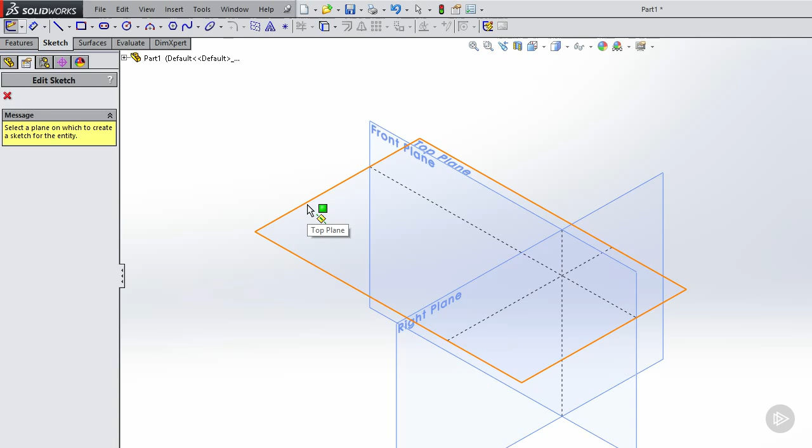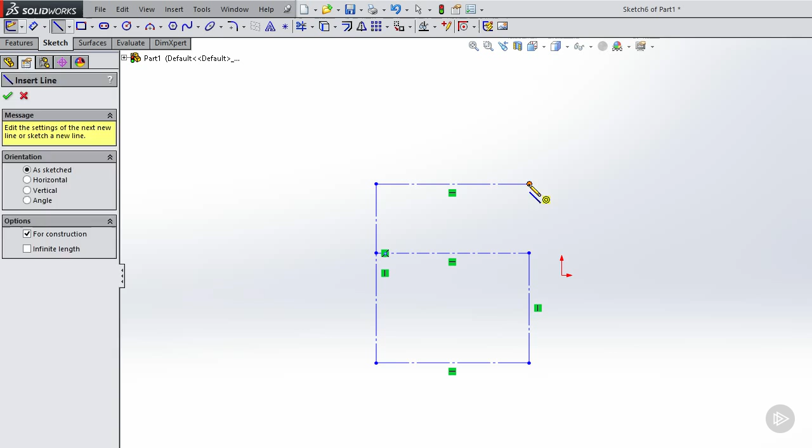The first thing we want to do is open up a rectangle sketch on the top plane, making sure it's for construction. I also want to draw a center line right about here, then trim this away because we're going to add two more lines like this, and make them equal. You'll see later on why I'm doing this.

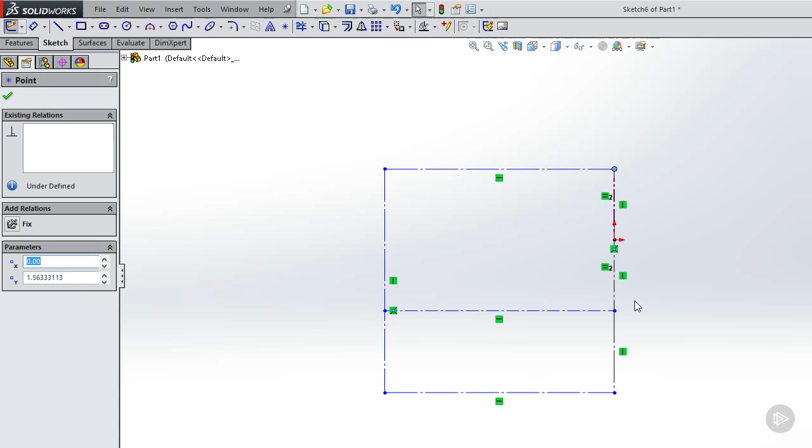Basically, this is going to be the top view of our controller body. Because the controller is symmetrical, this is actually the center of the controller, and this is the far left side. I've designed it this way so we can control the controller body in this area, and the handle will come down here, so we can control that dimension as well.

So let's measure this to 4 inches, and we're going to make this 3.1, and for this dimension we're going to make it 2.3 inches.

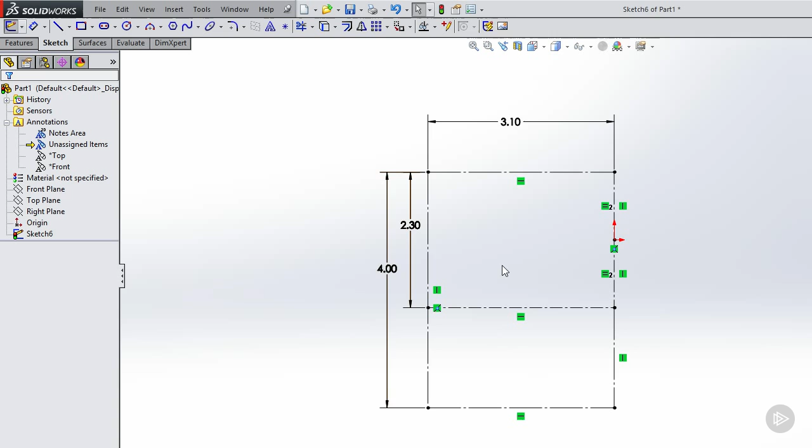Now that we have the overall height, front to back, of the controller defined, and also the width from the center out, we're going to open up one more sketch on the front plane.

This is also going to be a rectangle for construction. What we can do is grab this point here and snap it right to the origin. This one can be pierced to that line, so now we have defined dimensions there. You can see the lines turn black.

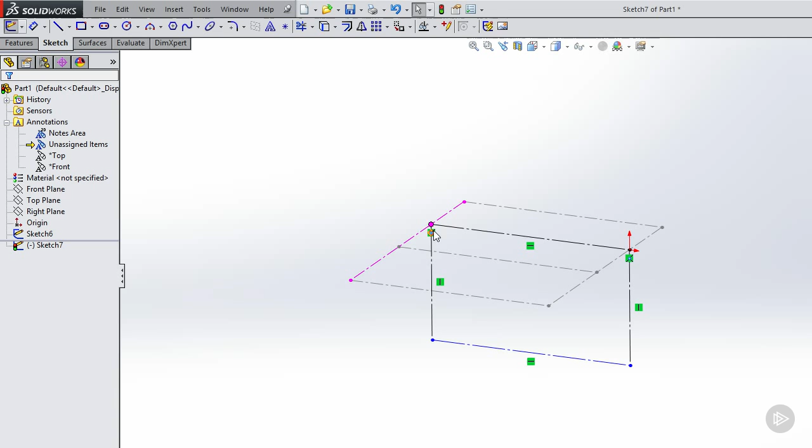For the height, we're going to make this 2.2. I want to add one more dimension with a line down here, and we're going to make this 1.3 inches.

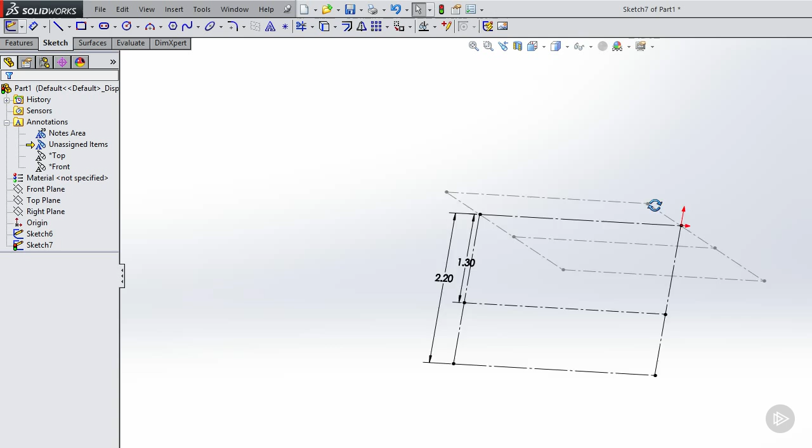So you can see now we have the overall height defined. This area in here and this area in here will be where the controller body actually will be. Out here and down here is where the lower half of the controller arm will be.

I kept everything centered on the origin, so that if you're doing a lot of mirroring, it works out much better when using the right and top planes instead of having to create planes on your own. For the next lesson, we're going to be sketching out the controller frame itself by using projected curves, which will be drawn from the top and the right sides.